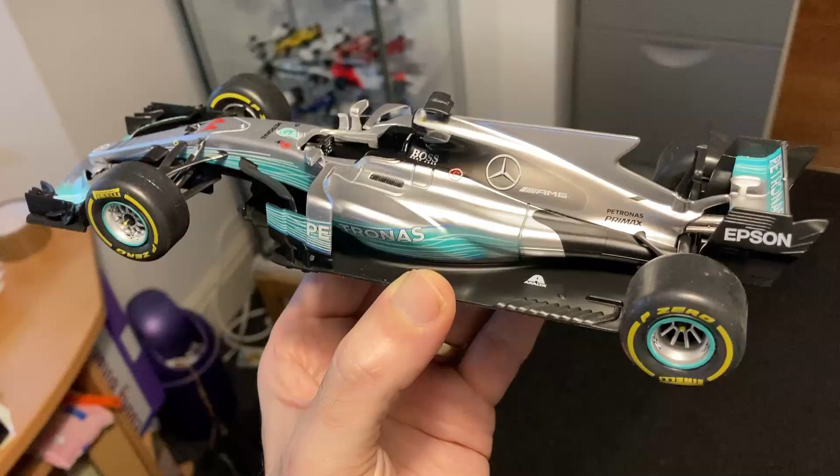Welcome back, viewers. In today's video I'm doing something a little bit different. I'm taking one of my slightly broken models.

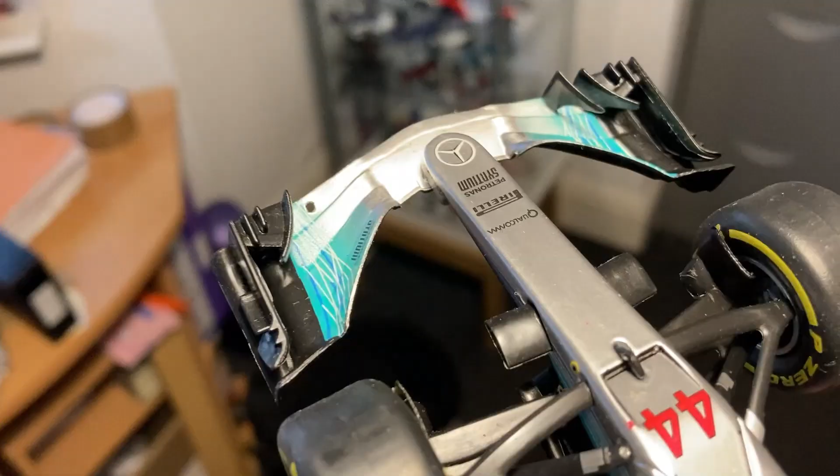This Mercedes has lost a little winglet. You can see the little hole in the front wing where it used to be. Unfortunately, not only is it broken off, it's also been lost. So today I'm going to show you how I go about fixing something like this. I'm going to be modelling the new component in some 3D CAD software, and then we're going to 3D print it, and then finally glue it into position on the die-cast model. Stick with us, I'll show you each step of the process.

So the first step is to model the component in some 3D CAD software. The software I'm using is called PTC Creo Parametric. I'll just show you how I've built it up.

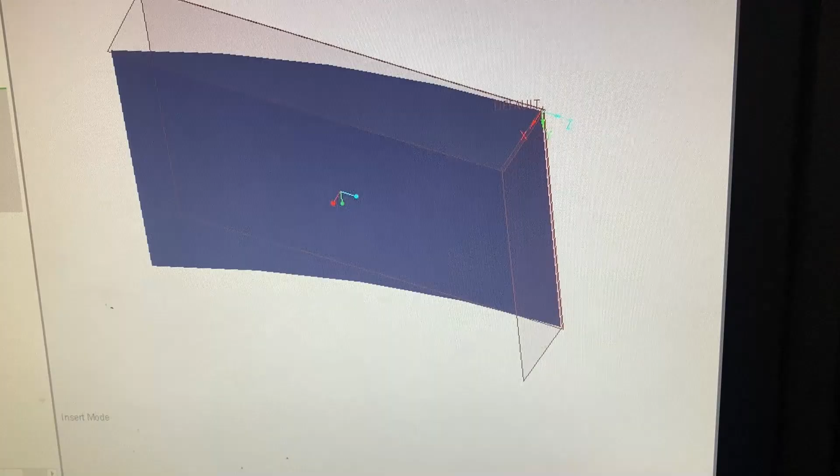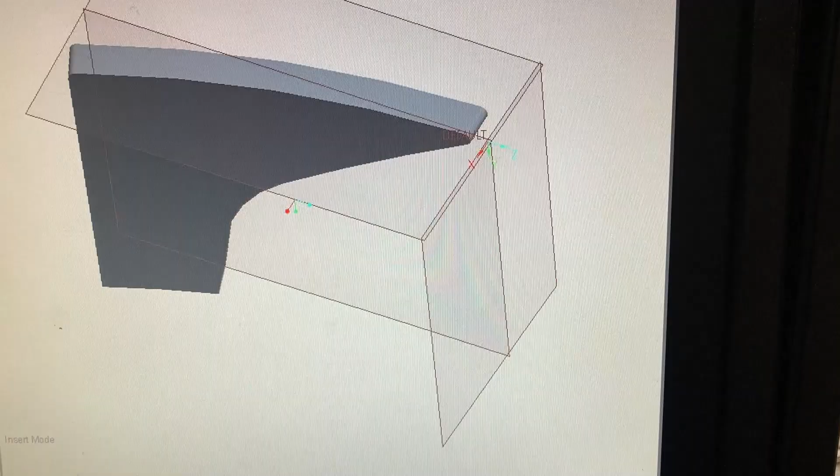Start off with a curved surface, then create a trim surface that creates the correct side profile, and trim one away from the other. Then thicken it up, and round off the sharp corners because the 3D printer won't like that.

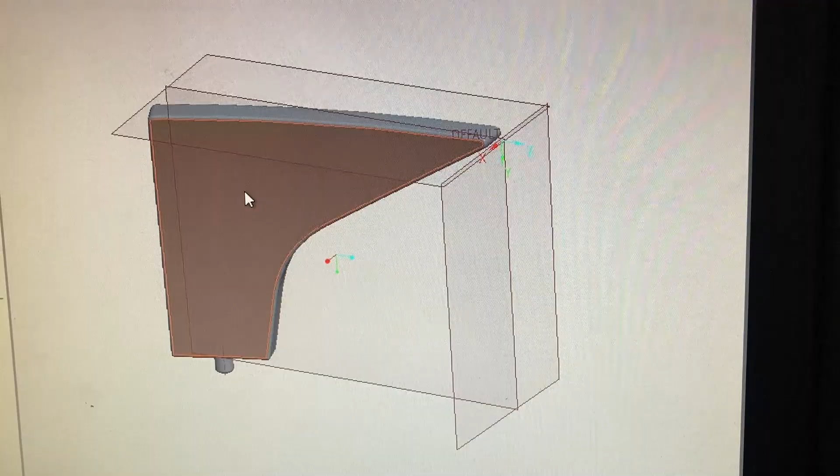Put a little pip at the bottom so that it will slot neatly into the front wing, and then a few more rounds. So what I need to do now is save this as a STL file, and then I'll bring it into some other software to get it ready to 3D print.

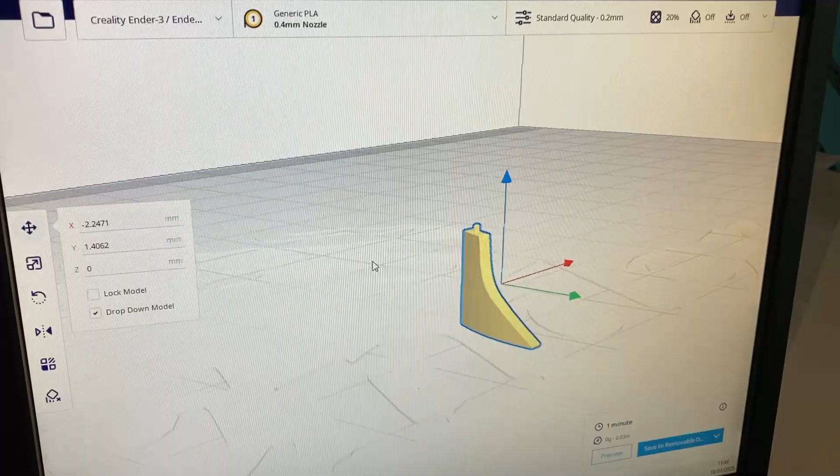Stage two is bringing the STL file into another piece of software called Cura, which prepares the part for the 3D printer. I've brought the winglet in and flipped it upside down so the long edge is on the base plate of the 3D printer, to make it as stable as possible.

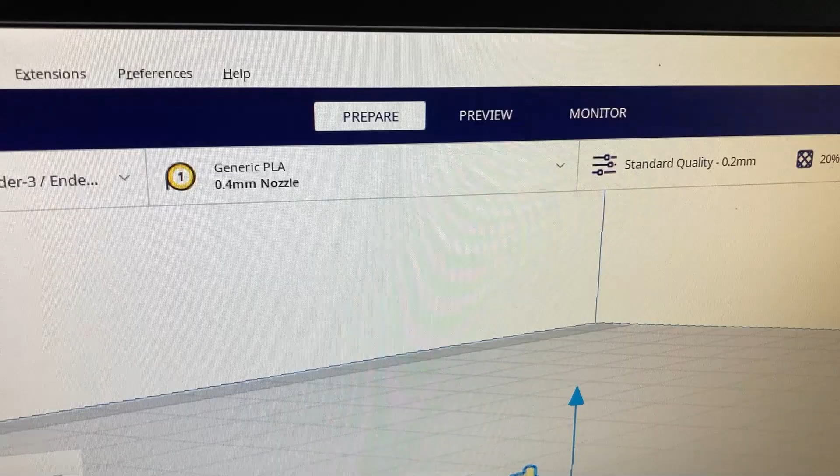Top left I've told it what 3D printer I've got, an Ender 3. I've told it I've got a 0.4mm nozzle and a few other settings, and then bottom right I can save it to a memory card, which I can pop out and put in my 3D printer, which is what we'll do next.

So here we are at the 3D printer. I've just put the memory card in, and now I'll go and select that winglet file and tell it to print.

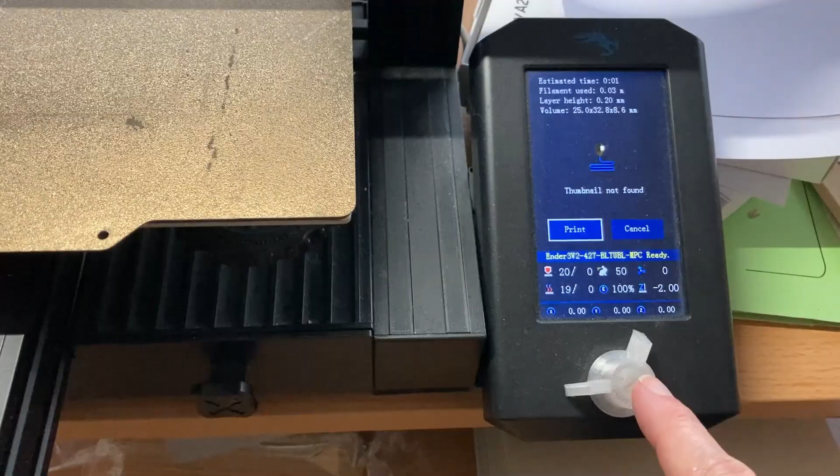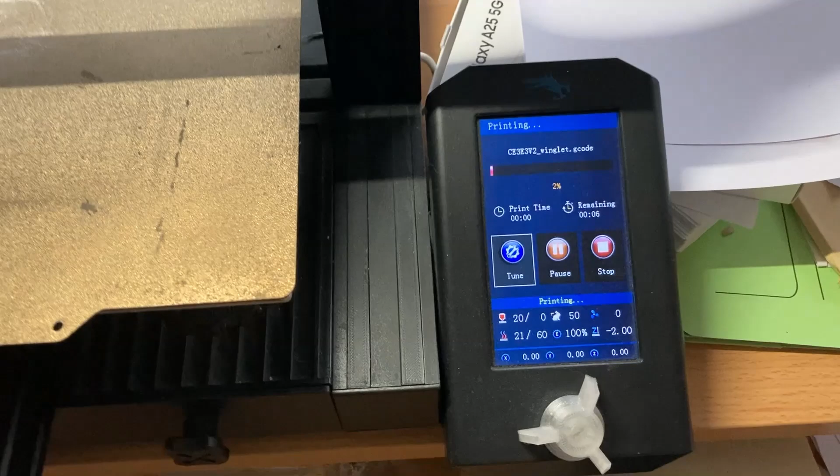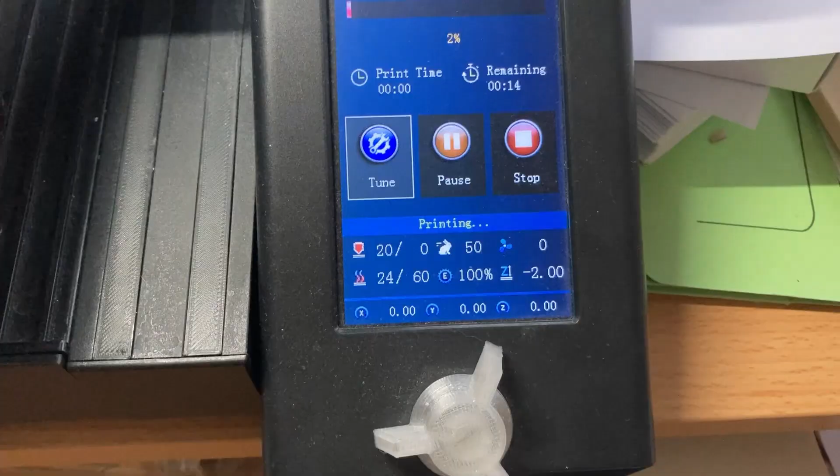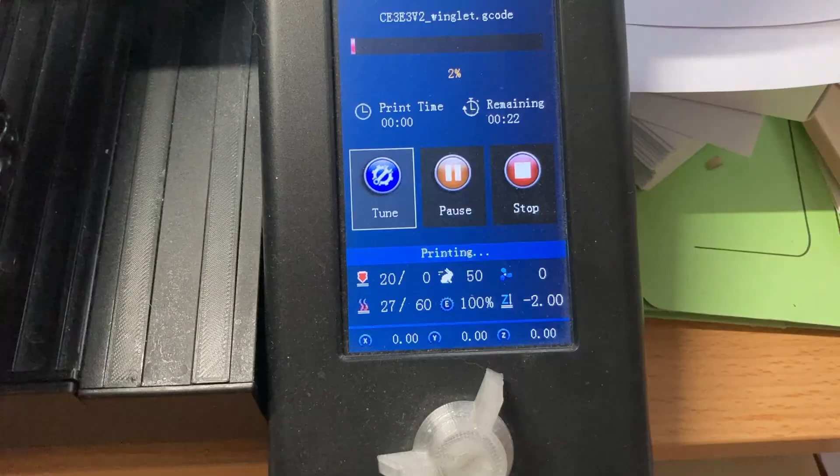So what the printer's doing now is heating up the base plate. You can see it's trying to get to 60 degrees C for the base plate, and then it will need to get the filament up to about 200 degrees C. This is going to take a little while, so I'll stop for now and resume once everything's heated up and ready to go.

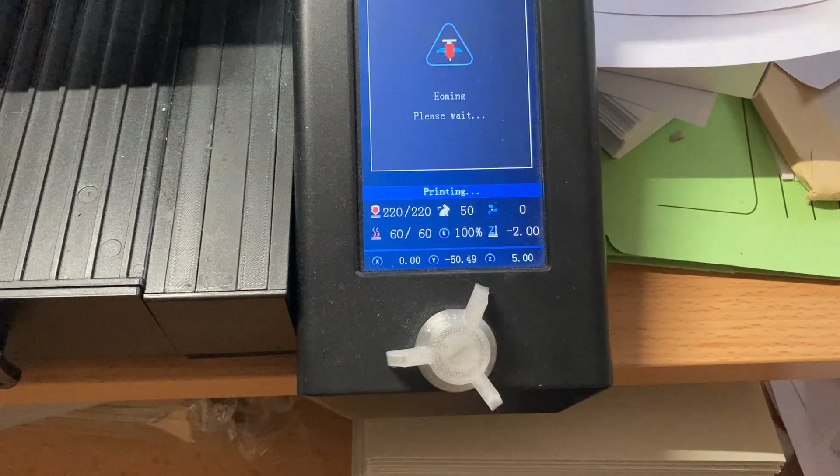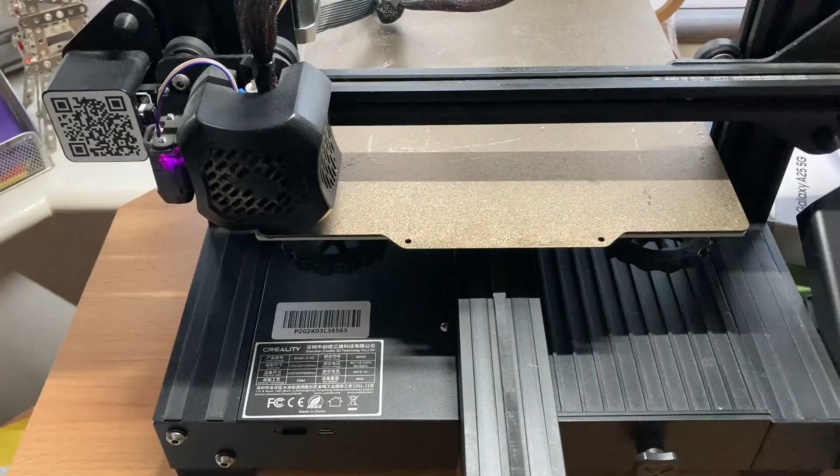So we pick it up now. You can see the base plate has got to 60 degrees C and the filament temperature is at 220 degrees C. The printer is just checking the base plate is level, so it does a test run along the side. Once that's all okay, it will move to the middle and start printing the actual winglet.

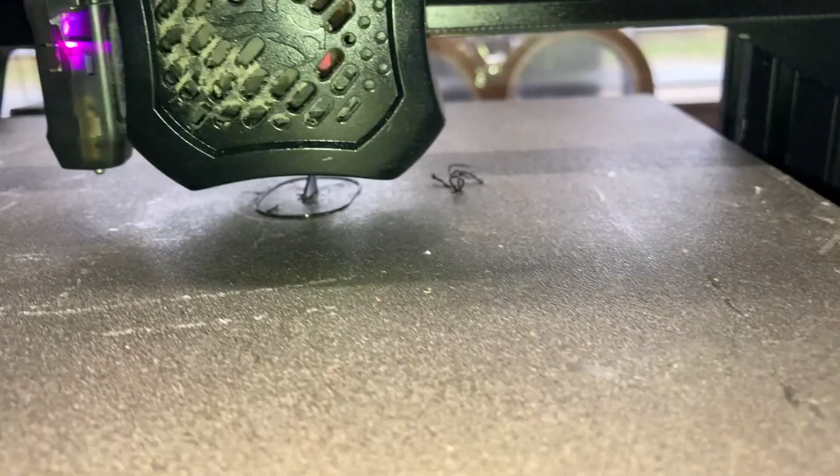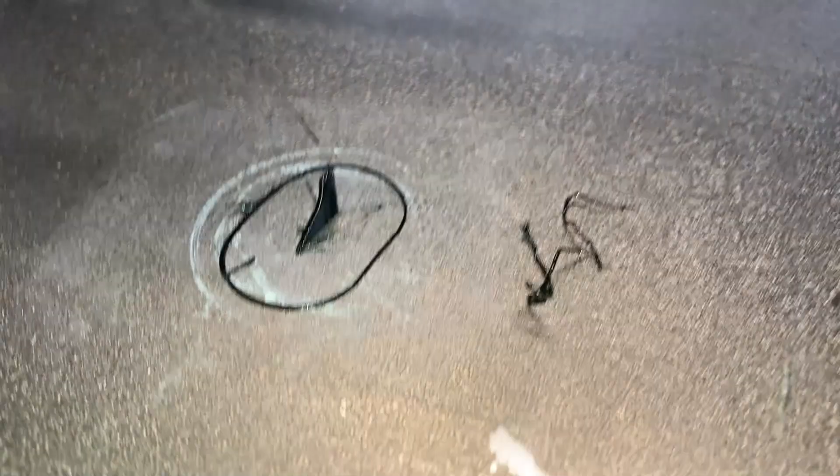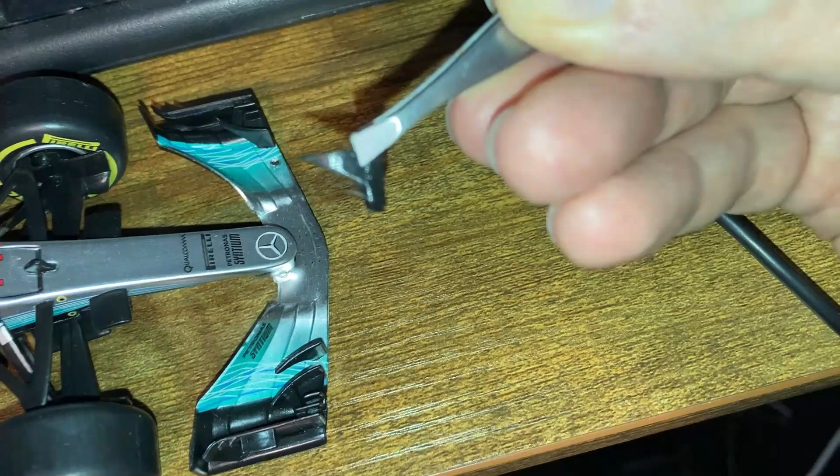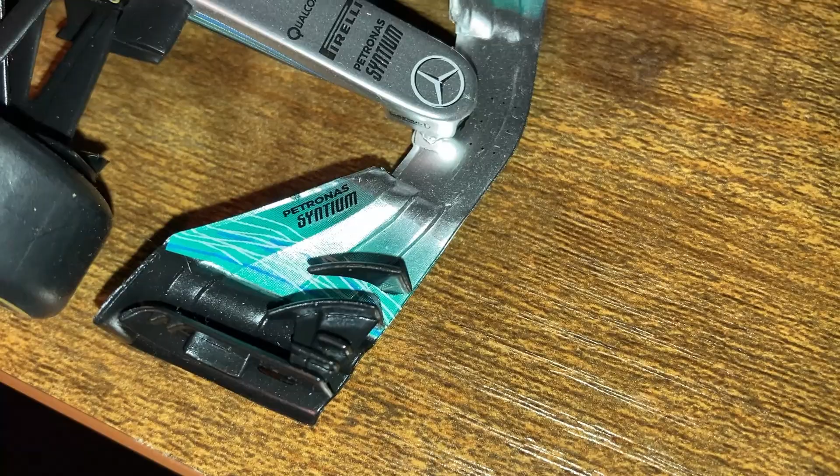And we have it, the new winglet has been born. So I've got the new winglet here with a blob of glue on the end, and we're just going to pop it into that hole in the front wing now. Try and get the angle right. And there we have it, a repaired front wing. There's the good side, and there's the new.

So there you have it, that's how I fix my die-cast cars when they lose small plastic bits. I model them in 3D CAD and print them on a 3D printer. So I hope you've enjoyed this video, it's a bit different to normal. Have a good day.